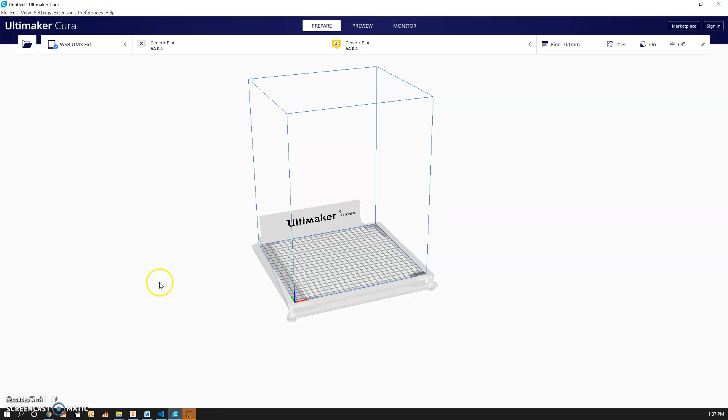Here's a slightly updated version on how to export your CAD files to be 3D printed. We're going to use the Ultimaker 3 here.

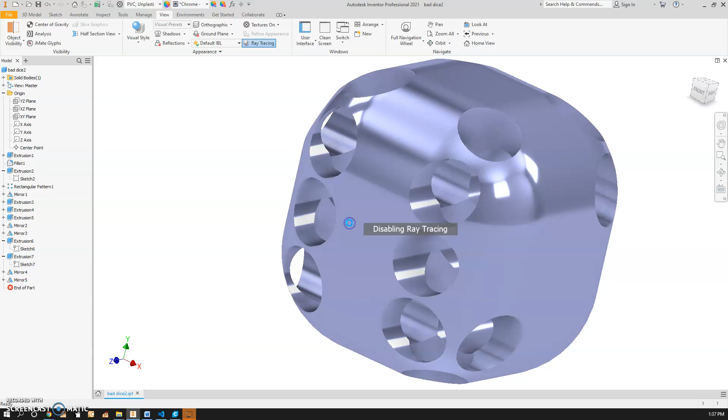So in Inventor, there's my die that I want to print, or rim or whatever. I'm going to go File, Export, CAD format. Got to come in here and say STL. It's going to be DWG by default. You got to click on Options the first time you do this on any particular machine. It's going to be on BREP. You want to change that to high.

We don't mess with any of this stuff. Maybe we should. You need to come up here and change it from centimeters to millimeters. Then hit Save.

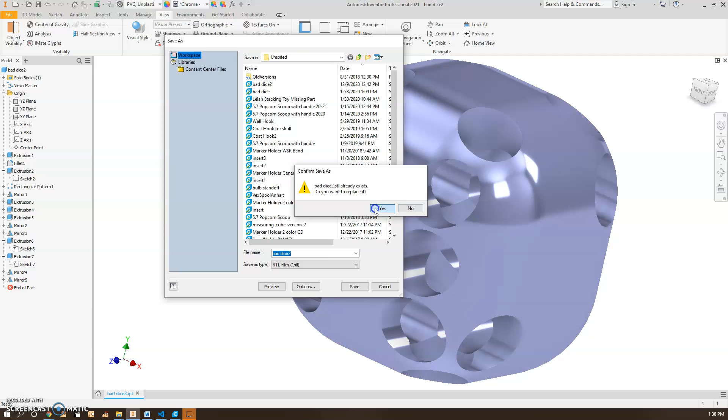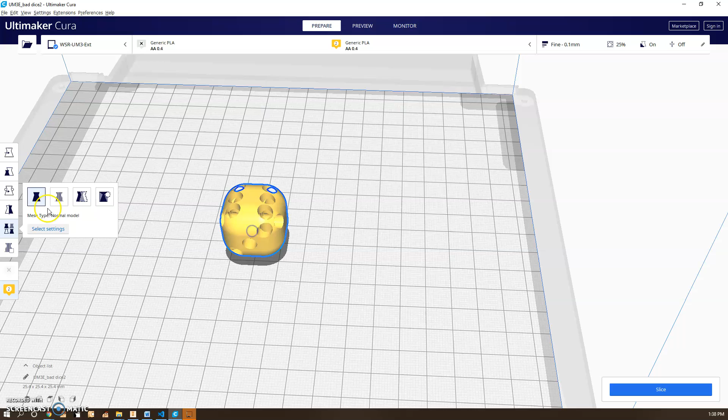And then in Cura or FlashForge's software, whatever we end up using, you bring it in and you figure out your printer settings. I'll just show you a few here. One thing you have to think about is, how fine do my layers need to be? Some of us, the ones we've done so far, they've designed it too small so you can scale it to the size you want.

That's awful big. This one is set to be about 1 inch by 1 inch already, but maybe I'll leave it 200 for visual sake.

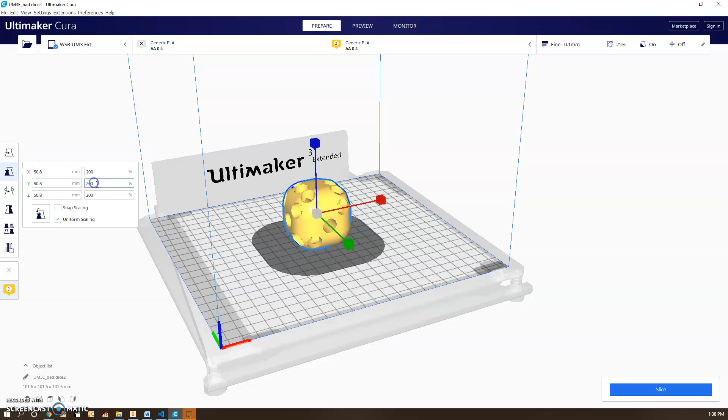So you got to think about maybe which side should be printed down. I print the one down, but I don't know if that's best. It kind of depends on the print. That side is going to be flat, smooth as printed on glass.

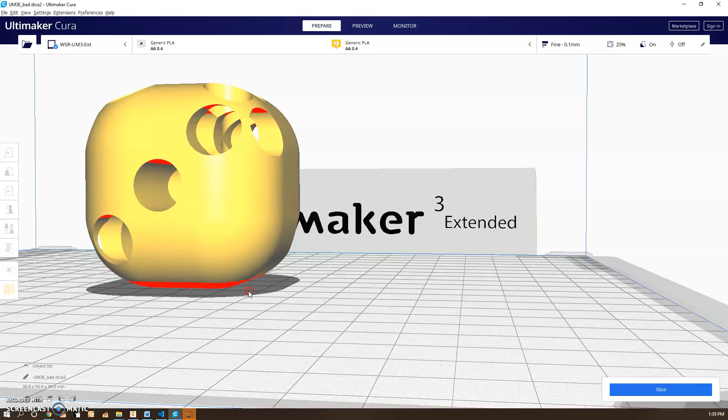I was thinking about whether or not you need support. Unfortunately, this fillet won't print very well. Maybe it'll print better on a thicker layer.

You have these predetermined settings up here, and you can change those if you hit custom. So maybe 0.1 or even normal. It depends on how fine a detail you have. Fast might work just fine.

Got to think about infill. How thick you want it. A gyroid is probably one of the strongest compared to its weight.

When you're ready to go, typically we don't want plate adhesion, besides maybe a skirt, because it'll stick to it too much. And there's a million options in here, which makes it tough.

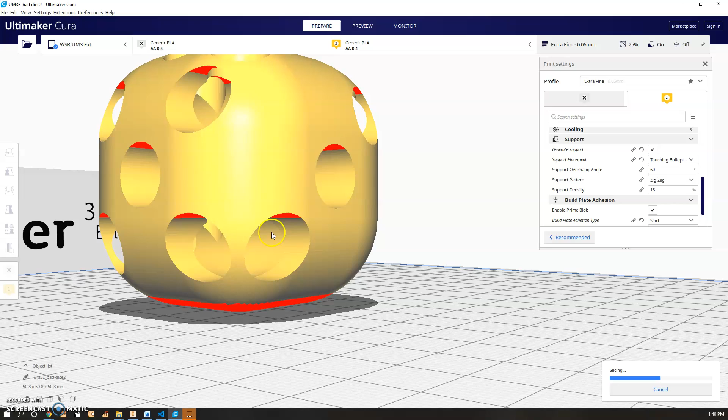Do you want your support just where it's touching the build plate, or do we want support in here as well? See, the red marks are kind of like danger, not going to print that well, but I guess we'll see. Otherwise, you have to break the support out, which sometimes is a big deal, sometimes isn't.

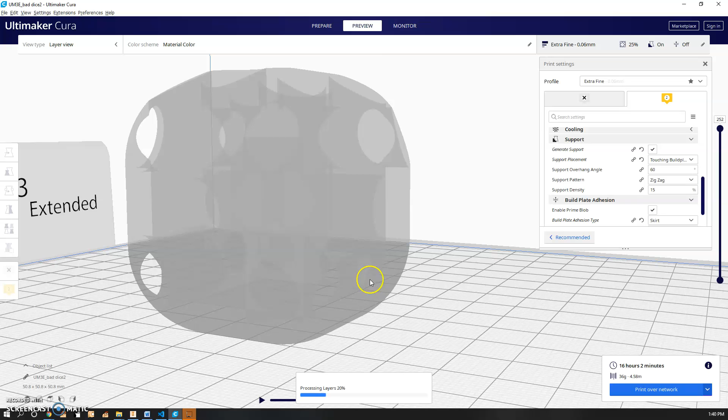So you got extra fine. This is going to take 16 hours. If you click on Preview, then you can kind of see how it's going to print the layers. My computer is awfully slow right now.

You can kind of see how it's going to be built from the ground up, how it's going to lay down some support, which really I don't think accomplishes much here. It doesn't even touch the thing sometimes. It's going to support those in there.

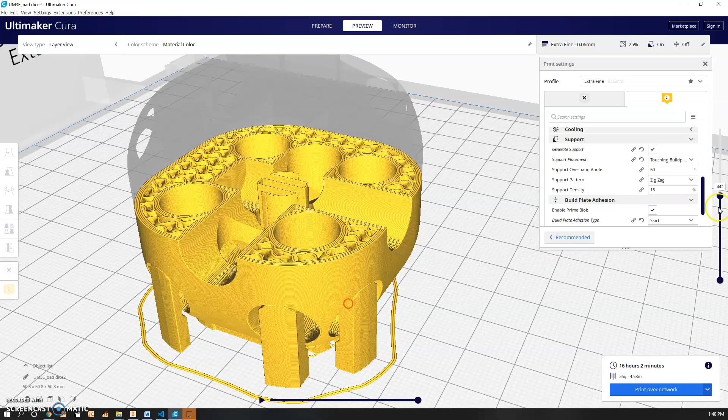That's how it's going to build it up. You can see the gyroid infill in here, little wavy lines that kind of switch between X and Y.

That's on the inside. You can make it hollow on the inside, or you can get it solid on the inside.

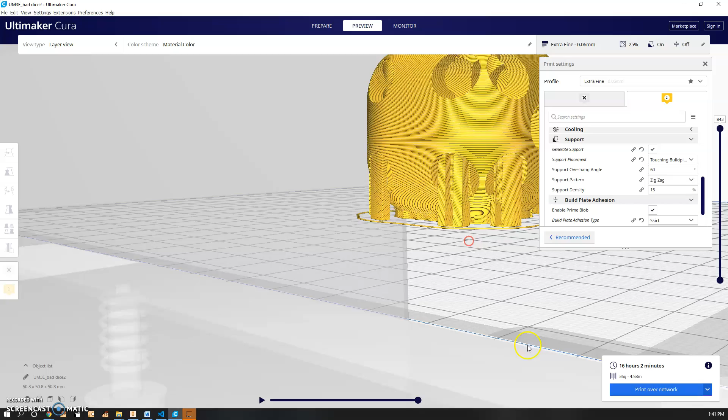Depends what you need. And then if you hit Print over Network, because ours is hooked up to the network, it'll put it in a queue. And then in the monitor, you can kind of see what's been queued up, what's printing right now.

Maybe the camera works. It hasn't been working for me since yesterday. It's still not working. Don't know why.

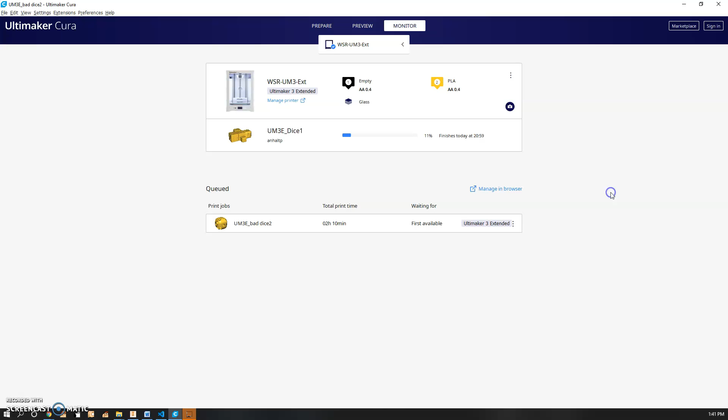Once this one adds in, you can delete it, or you can move it up in the queue if you want it to print before another one. And that's pretty much everything.